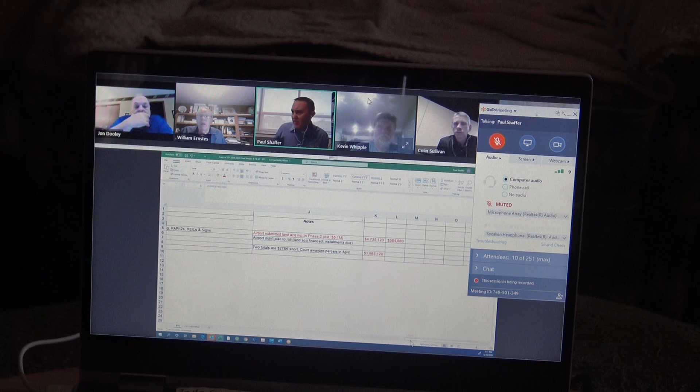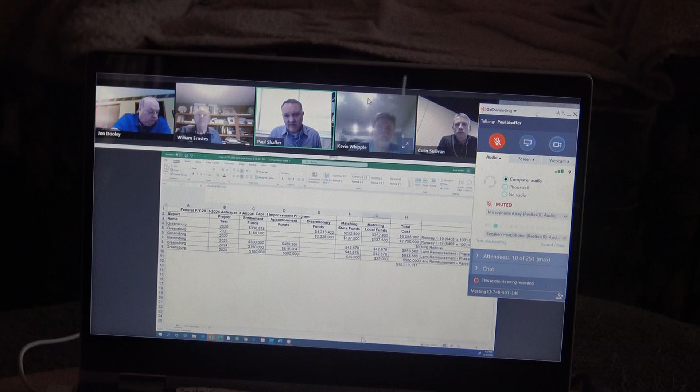Talking to INDOT, they said that our notification that we had secured the court orders came at just the right day, because this was the final day of their meetings, and they were considering whether to keep that $5 million programmed in '20 - it came in right at the right time. So again, excellent work by all of you getting that done in that time frame. Nice work.

Would you be able to email me that Excel sheet you have up? Absolutely, just at your convenience. If you wouldn't mind, Paul, could you just send it to all of us? All right, I'll do that too. Yep, I'll send it to the whole board.

Now, you'll want to keep in mind that this is what they call the planning program, so none of these amounts are guaranteed. You got to take it with a grain of salt - this is their best guess right now. It's all dependent on actual bids, and you really can't count on these dollars till the grant is written. But these are the best numbers we've got right now.

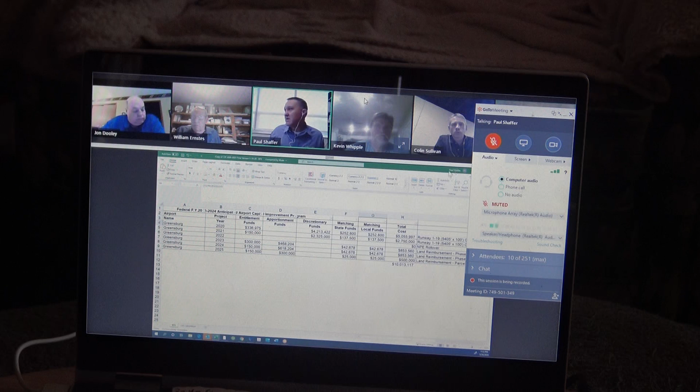So that takes us to the project, and I know I've gone over pieces and parts of this with individuals at different times. The objective here is we want to approve the advertisement, and we'll run through the plan sheets at a high level in the public meeting as well.

The plan right now is to advertise this project on or around June 8th. The bids would then be due at 2 p.m. on June 29th, going to the clerk treasurer's office. Now, the 29th is one week after your board meeting. The bid opening doesn't necessarily have to correspond with the board meeting.

Because we're just going to submit it for the grant application at this time, the board won't really have to take action on the actual grant or any of the awards until we get that back in. So this evening, since we have the land and INDOT's planning on giving you a good substantial amount of money, after we run through the plans and go over the concept, I'd like the board to make a motion to advertise the project, open the bids on the 29th, and submit a grant application with all the corresponding professional services documents and contractors' bids on the 30th of June, then wait until the FAA sends us the grant paperwork.

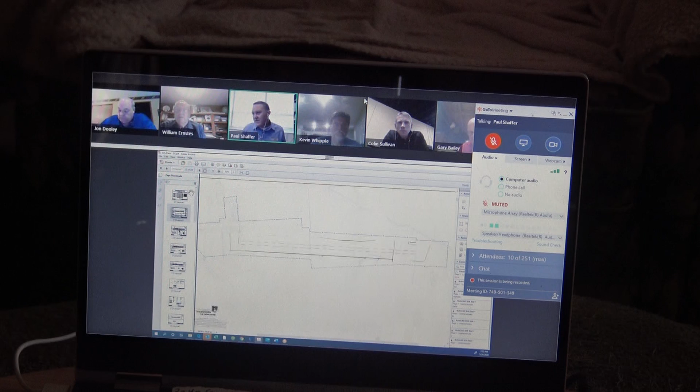I know this is going to be very difficult to see on your screens. I know I've already tried to go through some of this before the meeting a little bit, but it's going to be challenging. This is the scope of worksheet that gives a very high-level view of what we're doing.

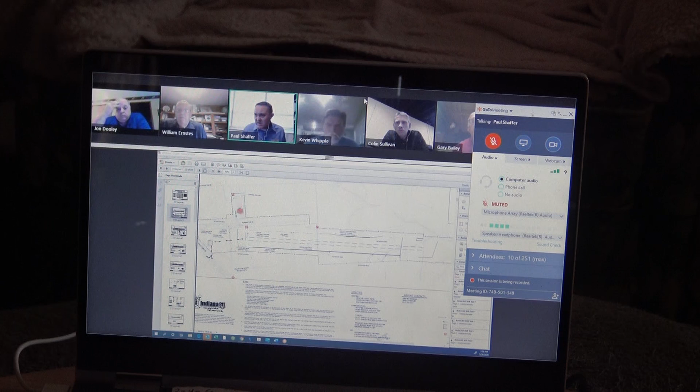This dash line, if you can see my cursor here—let me pull up a spotlight. This red spotlight is the outline of where the future runway will be. Here is the existing runway, the existing hangars, and so forth.

These red X's are basically where we want the contractor to drive. The contractors will be entering the site off of the state road, using an existing drive and the INDOT right of way to get in. The existing runway will be open the entire time while they do this grading.

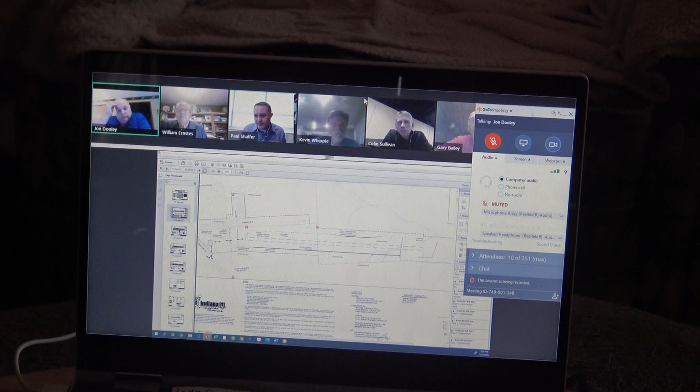Now let's see—got to zoom in here a little bit so you guys can see, and I'll work from one end, then go through a few of the more detailed pages. Here on the north end...

This raindrop shape and this little raindrop shape are our first basins for storing water. Basically, this is going to collect all the water between the state road and the north end of the runway. These black lines here are a drainage pipe system—we'll get into where field tile and all that is in a second. This line here is an overland flow, a swale between the existing runway and the future runway. These black pipes are all storm sewer pipes that'll go in.

So there'll be a collection basin here, and a collection basin here. Then from there we're going to be building up. We're pretty much at grade in these locations on the north end. As you go south, we're having to put in quite a bit of fill. But south, for those familiar, there are basically three major swale lines that go off of the adjoining fields, draining approximately 200 acres of field towards our project site.

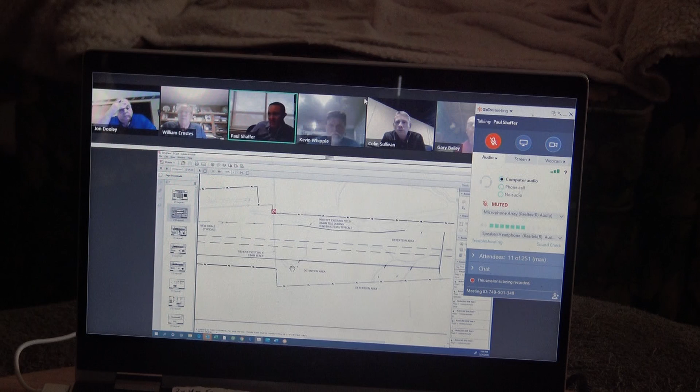But the tiles follow these existing drainage structures, so we're capturing those into our drainage pipe—you can see right here, we're just going to pick those up. In addition, right before it goes into the pipe, we're creating these little funny-looking detention ponds, and they won't stand water all the time—they'll accumulate water and then drain dry. The reason there's one at each of these is because the water runoff from the 200 acres needs a place to go while it enters the drainage system.

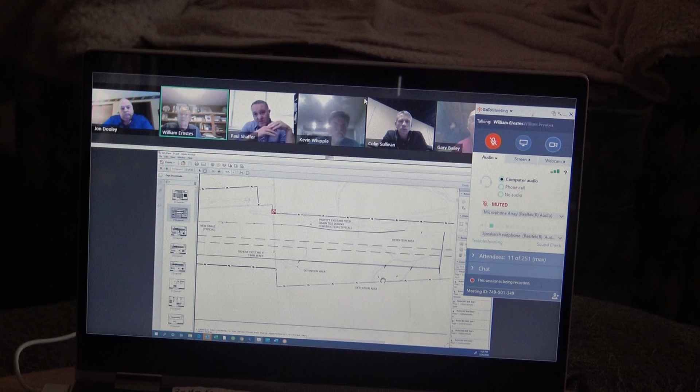Because as we add impervious area, we can only release the same amount into the stream as was going in prior to, so we have to limit it. Our design is a 100-year design storm, and we have to limit the flow down to a 10-year pre-construction amount to a 100-year post-construction amount.

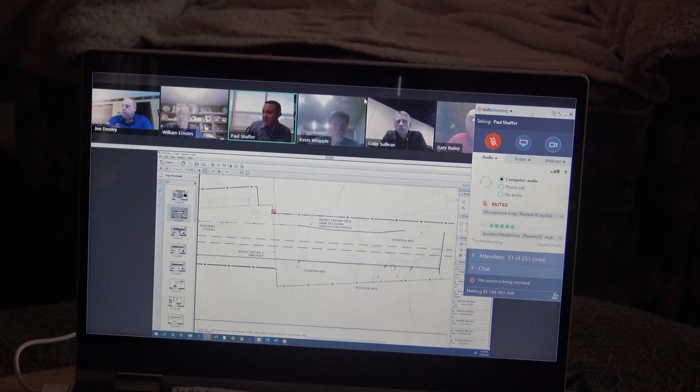So we have to have these little areas to store the water, and that's what these little basins are. You can see they're strategically laid out so they will not stage water onto any of the adjoining landowners. It'll all be contained to the airport property, and then it'll enter into the system, into this pipe right here.

Then, as we go down here to the south, there's a big pipe that'll come over to a larger basin here. That larger basin is basically storing all the water that goes down to here, and then it'll release into the natural swale that goes into the creek, into Mud Fork Creek there.

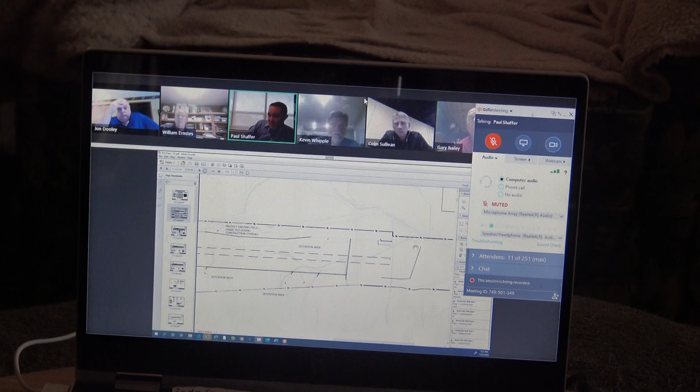I'll take you through some closer up versions with the contours on here, but this is kind of the high level. Here's the end of the runway, and there's a couple more pipes down here that will take some runoff and take it around. So very high level, that's what that's going to look like.

For the members of the public that were concerned about drainage and so forth, we do have note number 12 down here. I'm not going to go through all these notes, but basically this is our catch-all on the field tiles that we don't know about right now, which there very well could be several, since we weren't given the maps.

So when we do encounter these field tiles, we are basically going to connect them into our new storm drainage system and concrete them into that line. And if they are too low, if the elevation is too low to where they will not connect just because water flows downhill, we need it in a downward slope. If it's too low, then we'll bypass that tile all the way under our project site, because at that point it'll be so deep it won't really impact our project.

So the moral of the story is there will be no field tile abandoned or grouted unless it is to be exported and not used anymore. Any adjoining tiles coming off of any of the other properties will be reestablished, reconnected, or rerouted in our system around, which has been all sized based on the local drainage ordinances.

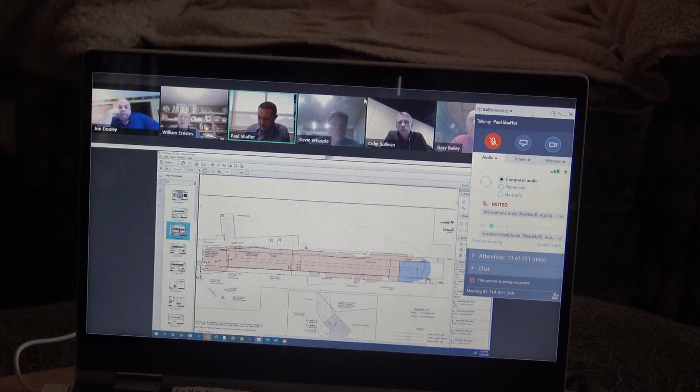And so that kind of is a very high level of the scope. I'd like to take you through the phasing now. On this screen, it basically shows you what we just talked about, but it's got a big orange blob and a big blue blob. The orange blob is basically breaking the project into two phases. Phase one is obviously the larger area, phase two is the smaller area on the blue end.

The reason is because all of the orange can be constructed outside of the floodway. The blue has a little bit that goes into the floodway area, so we're saving that for last because we've got to get a DNR construction in a floodway permit. This part does impact it a little bit, but it doesn't go over the triggering limits here. So that's why we've broken this into two phases in the event that floodway permit doesn't come in time. But we've got plenty of time, we don't anticipate it being a big issue, but that's why that's broken out like that.

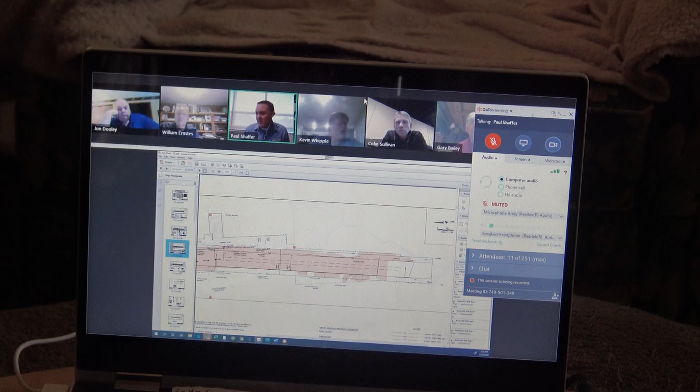So let's fly down through the program here. I'm going to skip ahead a few sheets and get to...

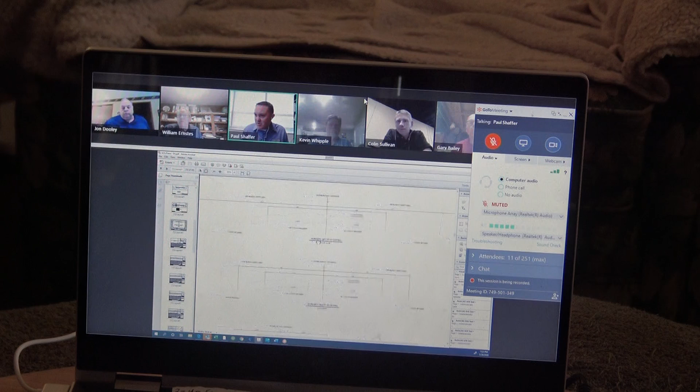This is showing the typical section. There's two different typical sections right now, depending on where you're at on the job site. This dashed line is where the future runway will ultimately be in the next phase, in the paving and lighting phase that's advertised next year. But for this year, we're just building to this lower light line. When we come back next time, they'll dig out a little of the material we just placed, but then fill that back in and use it for the shoulder fill.

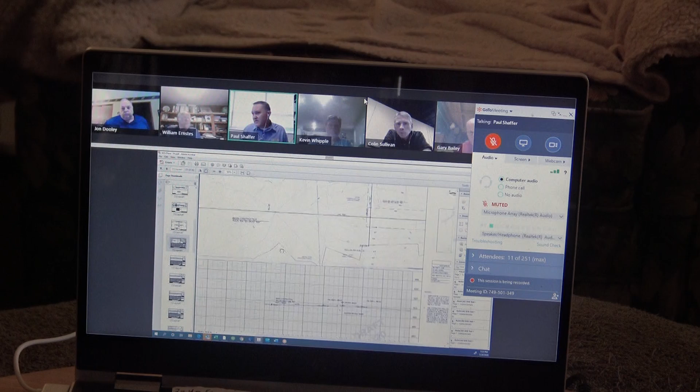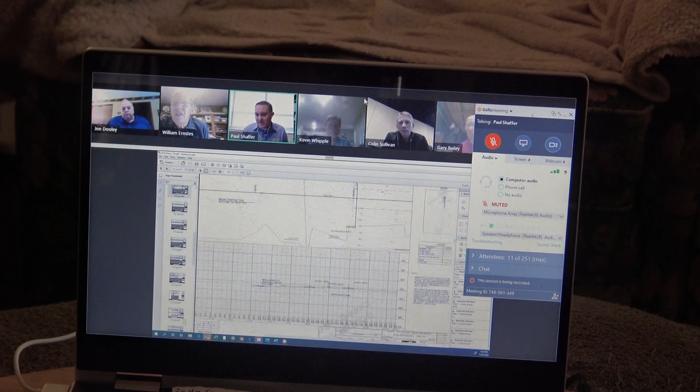This gets into the plan and profile sheets. I'm going to go down to the grading plan because I think you'll be more interested in that right now. The plan and profile shows the future runway center line and the elevations all the way down, how it ties in. But I think how these basins are graded out is of more interest, because this has the center line in there, it just doesn't show the side view.

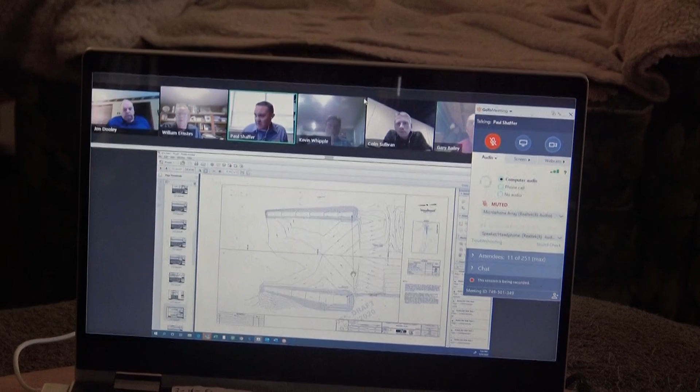So you can see those two basins on the north end that we talked about early on. Here they are, all drawn out with their contour numbers and so forth. And you can start to see the pipes in here and how they connect.

So I'm going to work my way down the runway. We're on the north end. This little view here kind of shows you where you're at on the project site. We're all the way on the north end, and station 100 is going to be the north end of the runway.

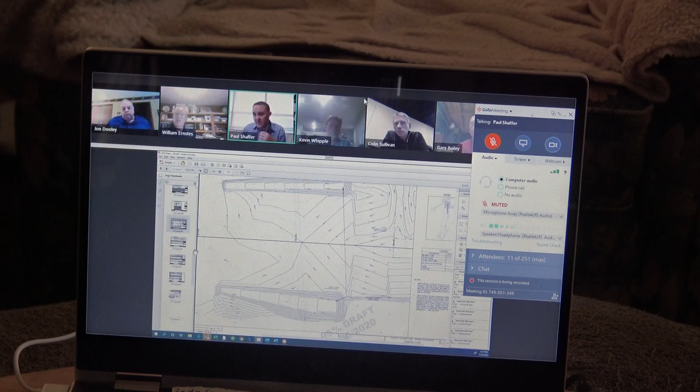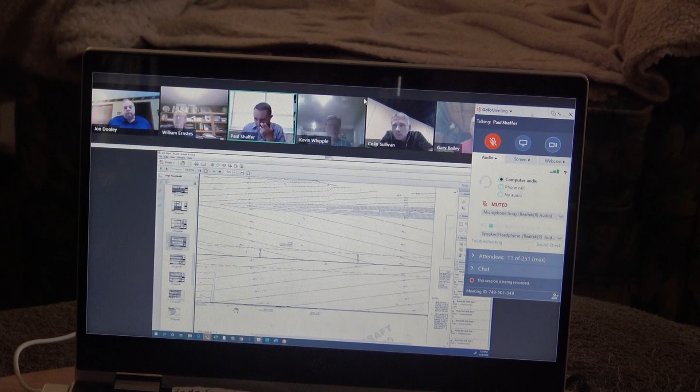Now we're just down the runway a little ways. You can see it's mainly contoured. Here's the pipe that's carrying all the water from those basins to the north, down to the south. There's inlets every 400 feet per the ordinance, all the way down so you can access it. Here's the above ground swale that we talked about, and it's working its way south.

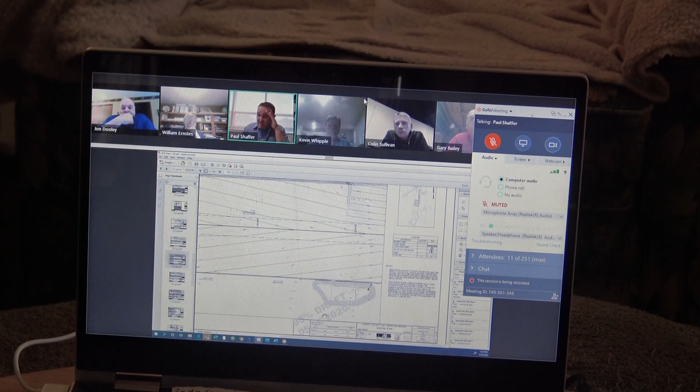Then we get into that swale becomes more pronounced and is going to enter into a pipe on that side. And then on the west side, here's the runway still in the middle. All these darker lines are the proposed contours, the dashed ones are the existing. So you can see here the existing is coming in to where we're building our embankment, and this is a natural waterway or swale that's coming off of the neighboring field. So here's the little basin that we're going to use to store the water, so it can stage into the pipe without backing up off of the airport property.

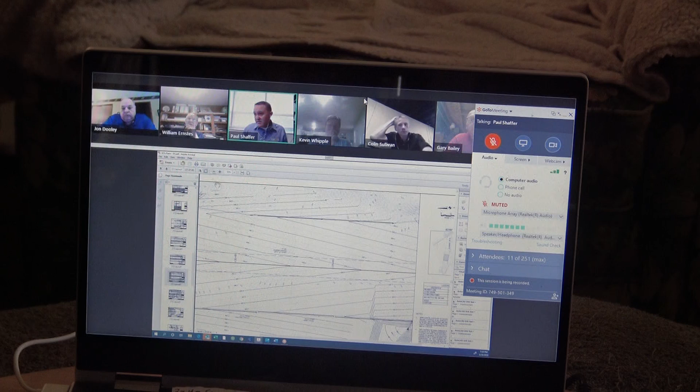And then we're going on down the runway, similar to the other ones, but now on the east side we're in a pipe instead of being open swale. The reason is there's a steep drop off here. In order to get these grades to work, the pipe is not offset the whole way, but it's still outside the runway safety area all the way from there.

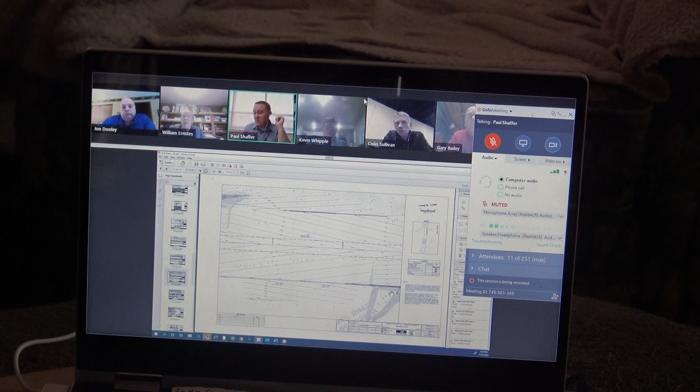And then we've got the inlets here, and in the bottom right of your screen, you'll see another natural waterway that was carrying water across the field. Again, same concept, we've built a bowl there to stage the water. There'll be a pipe that connects it. This one has an existing tile in it. The existing tile will be tied straight to our manhole structure and not into the side of the pipe, which is a better way to do that.

Now we're getting down pretty close to the last 1,000 feet of the runway on the south end. And you'll see here, there's yet another natural waterway that was coming across the field on the west side. Again, we've created a bowl here for the water to stage to enter the pipe. Now all this water's entered this pipe, and this is the only under-pavement crossing we have. We did that on purpose because every time you have an under-pavement crossing, that's a risk—risk for settlement or something to go wrong with the pipe.

So there's a large pipe that comes across here, basically collecting every drop of water from the runway before it leaves the airport site. This is useful for a lot of reasons. You can store it, but if you ever had a spill, this is a good place to stop it. If we ever start using de-icer chemical on the runway, we'll need a stormwater pollution prevention plan, and this is a good place to do monitoring. So it's a nice consolidated single discharge type system.

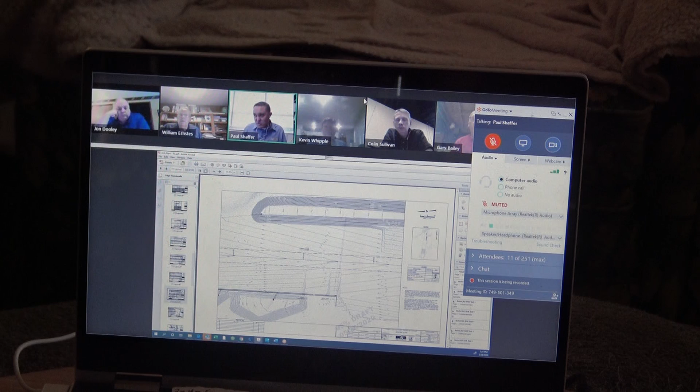Then this is the far south end of the runway. Here's where the future runway end will be, that dashed line. You can see where our contours are coming in and joining the rest of the world now. And you can see the safety area meets grading criteria, but it goes down pretty quickly into that lower area.

And then here, the eastern basin, the south end of it is here. There's a pretty large pipe that's outletting that. This small pipe actually brings water off the runway back into the basin, so it's not running directly into the creek. It's going to discharge into the natural waterway that already exists there, and it will be wrapped up with some flow control to make sure it's not eroding.

One thing you'll notice here, comparing the 30% plan set we went over last time to now, is we used to have a retaining wall in here. I told you last time the retaining wall's purpose was to try to keep the fill outside of the floodway. Well, it turns out that didn't work.

Even with the wall in there, the extended runway safety area down in this area was still going into the floodway, and it turns out the most restrictive cross-section of the floodway is right here. So as long as we weren't filling past that... the wall was back in here, which was eliminating some of this fill, but it didn't improve the situation from a cross-sectional area standpoint. Since the cross-sectional area was at its most restrictive point here and the wall wasn't helping with that, we decided to get rid of the wall and save ourselves a little bit of money.

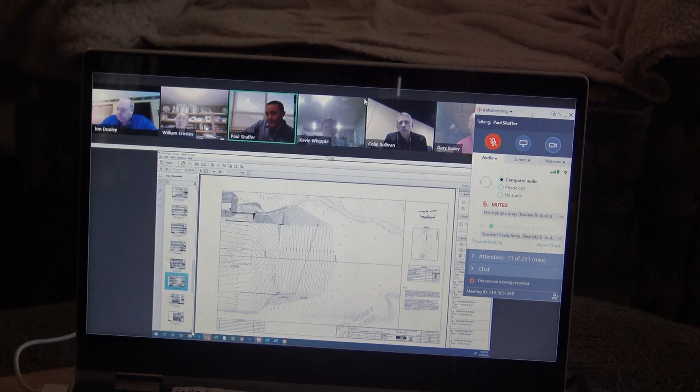So these are a series of sheets, and I'm not going to go through every one of them. It's quite boring for the average person, but I'll show you how all this is mapped out for those who really get into this sort of thing.

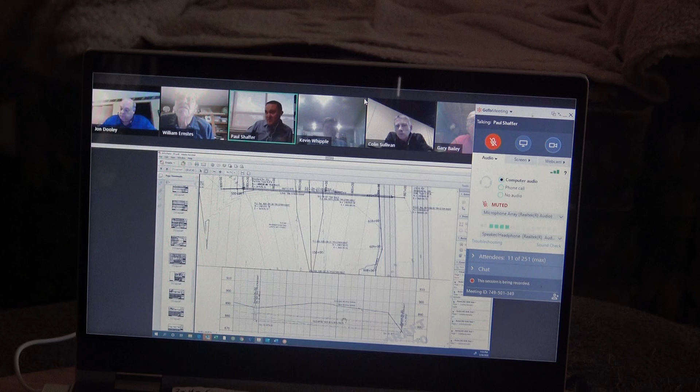So this is the pipe that's up on the north end, and there are profile sheets showing how the contractors know how to build it, what slope, what angle. So here's the manhole. This is 563 feet of 66-inch reinforced concrete pipe, and that's the slope. There's one of these profiles for the storm drain that goes the entire length down there. Every manhole, every pipe is detailed, and where the field tiles all connect in are all shown on there.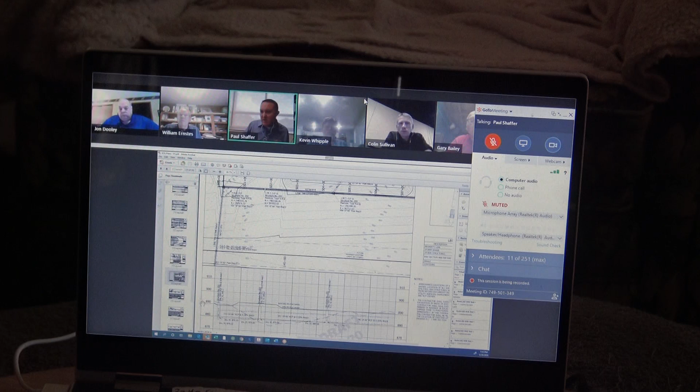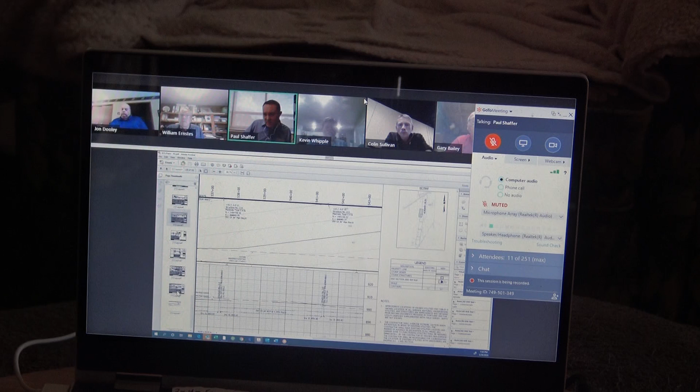So sheets of that go all the way down to the other... well, that's the... let's see... western point. You can see when you get in real close, it gets kind of confusing on where you're at on the entire sheet. I'm going to try to get down here to... this is what I wanted to show you. One more.

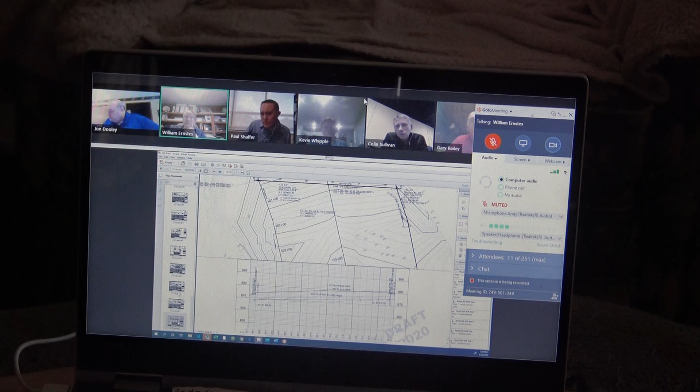This is the outlet from the bigger basin. That's the pipes coming out of the bigger basin.

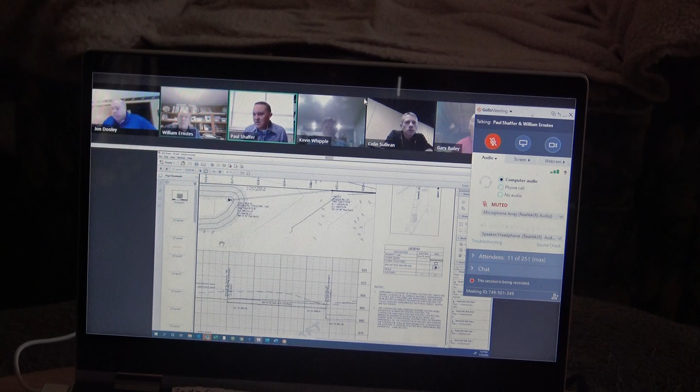So that's the bulk of the plan set. We don't have the cross-section sheets in here yet, they're still working on those a little bit. Between now and June 8th, they'll have those, and the drainage structure details will get added in. But for the most part, the plan set's all there.

So do you have questions on where we're at from the plans at this point in time?

Hey Paul, to what degree of certainty are we that the existing field tile is in good shape and we won't need to be doing much with that? We're not very certain. I have little confidence that it's in good shape, but when we intersect it, it will be in as good or better shape than when we found it. We really will take extra care to make sure we preserve those tiles the best we can. Okay.

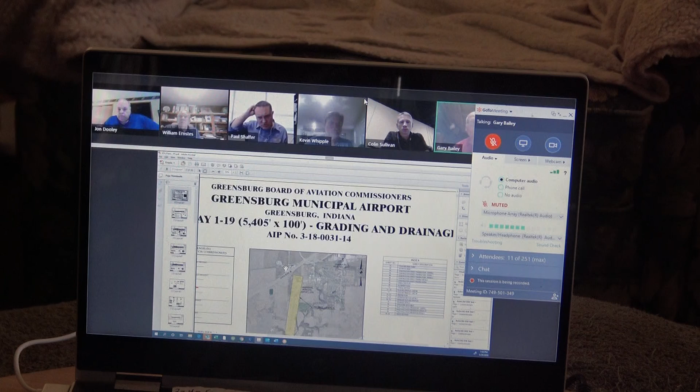I got one other question then. What time did you say the pre-bid meeting would be on June 12th? Oh yeah, let's go back to that. The pre-bid is 11 a.m., and the pre-bid meeting is going to be, we're going to meet at the airport terminal building, so that we can walk out and walk the site.

And I should say, this of course is subject to any executive orders that the governor might have, or any local orders that the mayor might have on actual meetings and so forth. We decided to go ahead and advertise this for a physical presence for the pre-bid because it's a large enough project, we think contractors are going to want to walk the site. But we have done a virtual option, and if we get to the point where it looks like we are not allowed to meet, then we will do the pre-bid virtually, to give the contractors some comfort there.

And then on the bid, the receipt of bids will be turned into the city clerk treasurer's office at 2 p.m. Again, we're planning on that being a physical bid opening as well, where the contractors physically deliver their bids to the city or mail them in by 2 p.m. on the 29th. Great.

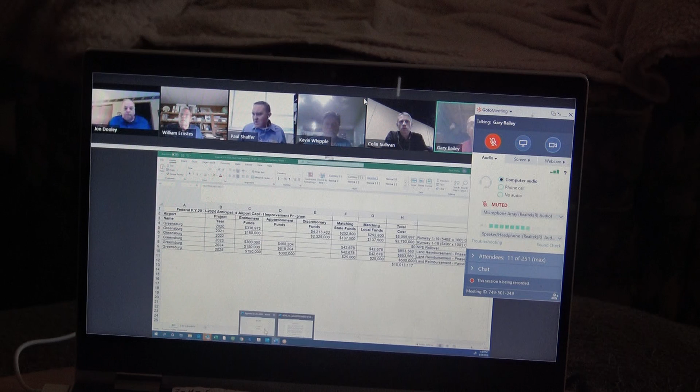Paul, do you need a motion then to advertise? I would like a motion to advertise and also to submit the grant application and corresponding professional services agreements to the FAA on June 29th or June 30th, whenever we have all the numbers pulled together.

Okay, I'll make that motion. I'll second. Roll call vote, please, Judy. Gary Bailey, yes. Jon Dooley, yes. Kevin Whipple, yes. Bill Ernstes, yes.

Now we need a second motion, Paul. I don't think so. I think that'll get the bids in and get the grant application in, and before you sign those professional services contracts and obviously the construction contracts, we'll wait for the FAA grant. So you're not really obligating yourself to those services or the construction contract at this time. We're just applying for the grant, and we'll wait for the formal grant offer before you contractually obligate yourself to any of those items. Okay.

How many people do you expect to bid on it? It's a good question, Bill. I know that we'll have three that have expressed interest in it already, and those are the major players. Two of them are major players that you're used to, Milestone and Dave O'Mara, have both expressed interest. And then I had King's Excavating out of Seymour that expressed some interest in coming up and bidding. I suspect, since there's no paving in here, that we'll probably have three or four additional potential grading contractors who might be interested as well. So we will certainly, as soon as this advertises, get on the contractor outreach and make sure we drum up as much interest in the project as we can to get you the best price. Okay.